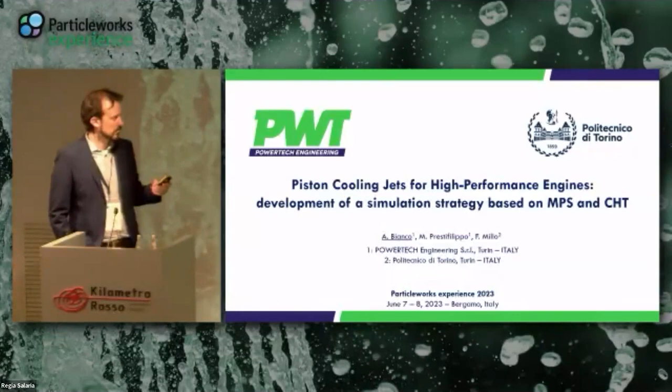I would like to mention that this work is the result of collaboration between Powertech Engineering and the Politecnico di Torino, and I'd like to acknowledge the contribution of my co-authors, Mattia Prestifilippo and Professor Federico Millo.

Let me just also introduce in one slide our company. Powertech Engineering is a consulting firm based in Turin, employing 40 engineers, and our core business is to provide simulation services mainly to the automotive field.

We are specialized in powertrain and vehicle simulations, ranging from 1D to 3D CFD, but we are very active also in hardware-in-the-loop and software-in-the-loop applications with our own test benches. We work mainly for the transportation sector for both on-highway and off-highway applications, but we are very active also in the marine sector and the power generation sector.

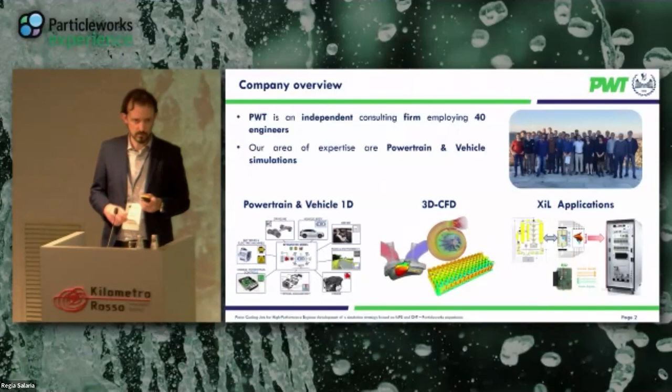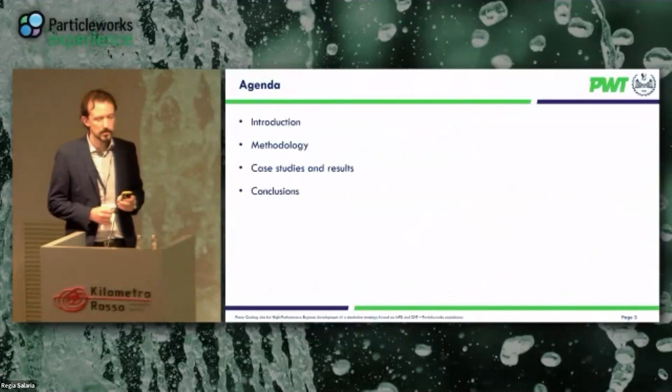Coming to the agenda for today, we will start with an introduction, and then we will describe the methodology we have followed and the main results we have achieved for selected case studies, and then we will wrap up the main outcomes in the conclusion.

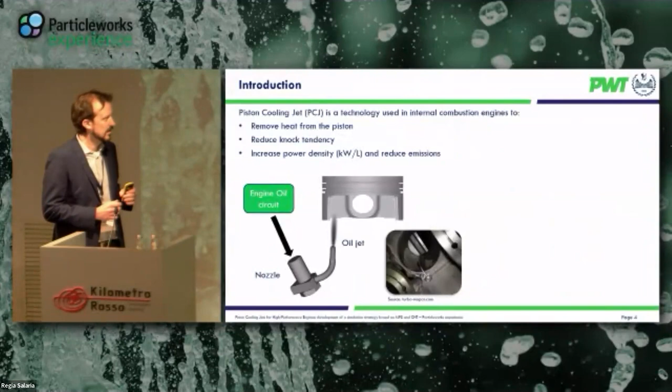So, first of all, what is the piston cooling jet? Given the presentation we have seen this morning, I can go rapidly through these slides. I would just like to mention that basically, thanks to the fact that we are able to control piston temperature, we are able to reduce knock tendency and increase power density and power output of the engine.

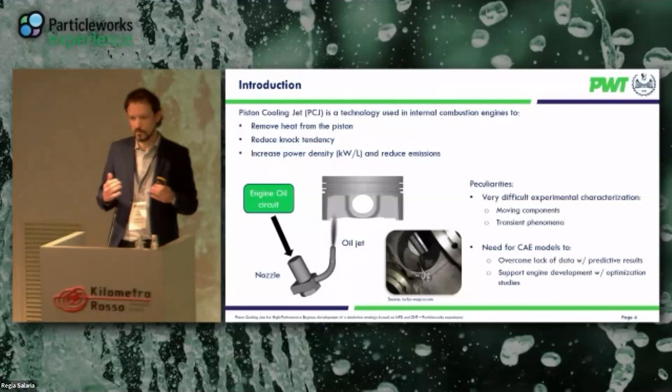Unfortunately, it is quite difficult to characterize this kind of system from the experimental point of view, and therefore we have to rely on simulations in order to overcome the lack of experimental data, as well as to support engine development and perform optimization studies.

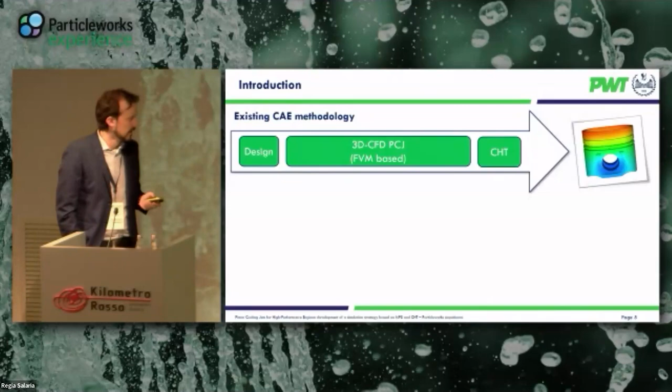This is the typical workflow that we previously adopted in Powertech to tackle this kind of simulation. Starting from a piston design, we performed 3D CFD piston cooling jet simulations using finite volume-based software, and then we performed a CHT analysis in order to extract the piston temperature distribution, as highlighted by this figure on the right. Unfortunately, finite volume-based simulations are quite complex because we have to deal with moving meshes, and this increases the user effort.

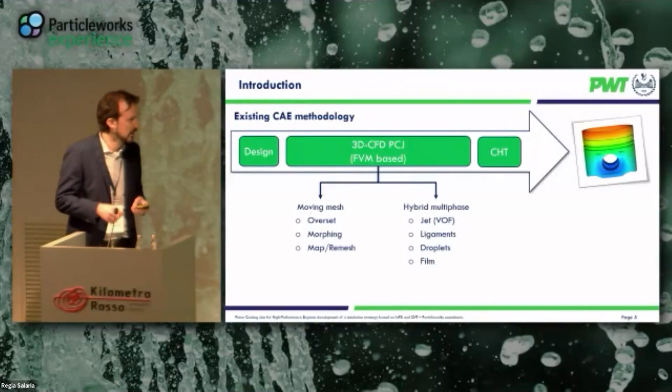Additionally, we have to deal with several multi-phase models, such as VOF, for example, for the jet coming out of the nozzle. Then we have Lagrangian models for the droplets, and eventually liquid film models for the liquid film forming downstream of the impingement zone. So in this scenario, we asked ourselves if it was possible to leverage the advantages given by Particleworks.

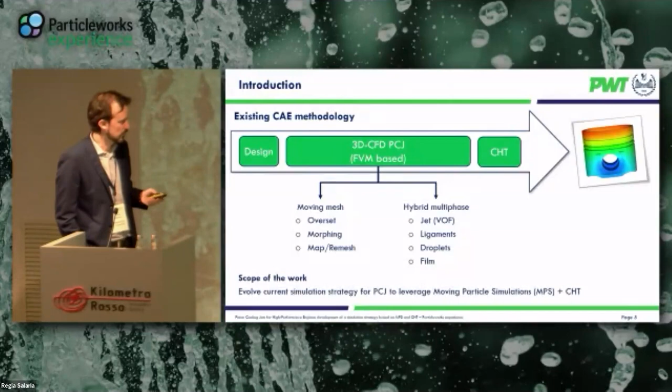We wanted to use Particleworks to speed up these kinds of simulations and integrate them within our conjugate heat transfer workflow. In other words, we wanted to move from the upper arrow to the lower arrow, where we substitute finite volume-based simulation with Particleworks, having the advantage of a meshless approach, using a particle-based description of the whole liquid. This translates into reduced lead time, and for us also the possibility to perform optimization studies.

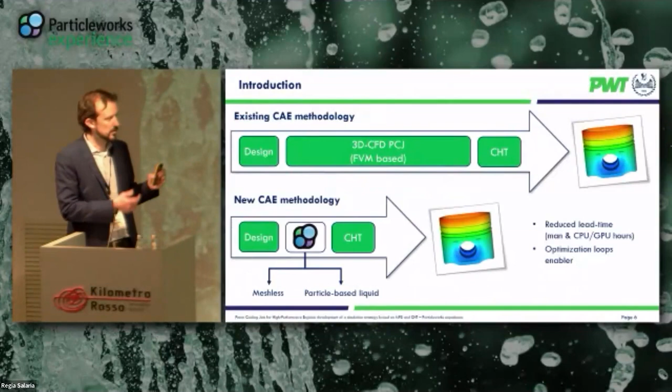In order to do so, we use what we call the stair-step approach. So at each step of this stair, we focused ourselves on modeling a simple problem still related to piston cooling jets, and then we'll move on to the next step, leveraging the knowledge gathered in the previous one.

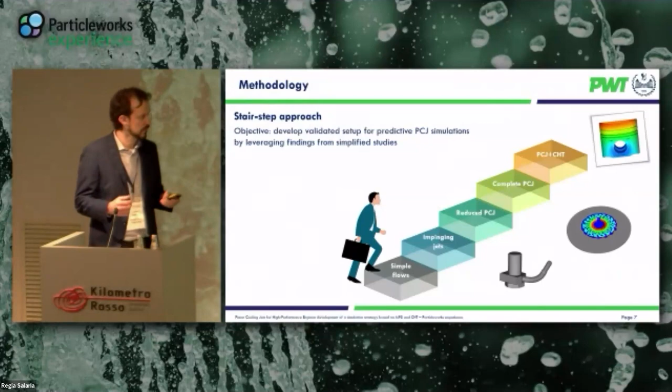For example, we started with simple flows, and we focused on what happens within the nozzle. Then we studied impinging jets in order to characterize the transfer coefficient in the impingement zone and downstream of it. We then moved on with the piston cooling jet studies, starting from simplified simulations up to the full integration with conjugate heat transfer studies. For the sake of brevity, in this presentation we will focus only on impinging jets and full piston cooling jet simulations with conjugate heat transfer.

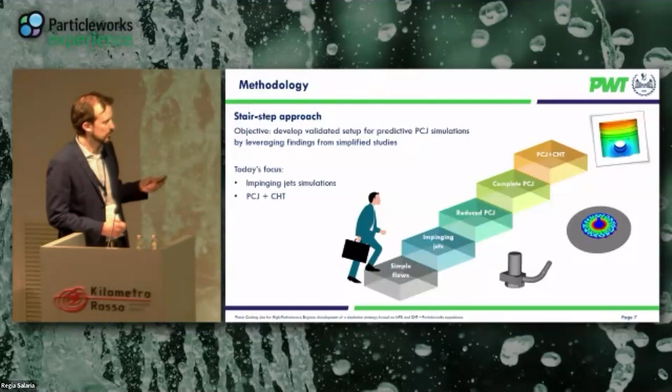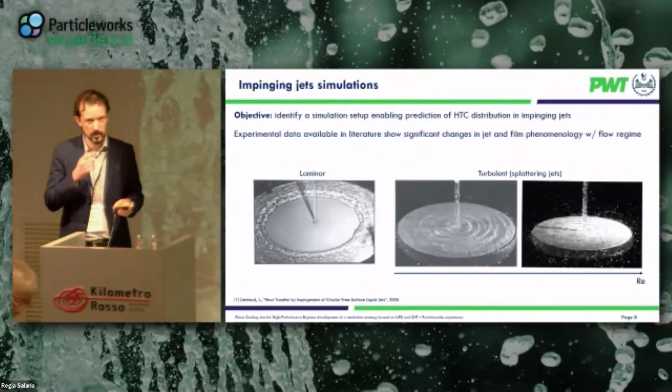Starting from impinging jets, our objective was the identification of a simulation setup able to correctly predict heat transfer coefficient in the impingement point and downstream of the impingement zone. In order to validate this simulation setup, we performed an extensive literature research, by means of which we identified suitable experimental data, and we found out that post-impingement dynamics are severely affected by the condition of the flow exiting from the nozzle.

For example, here we have some images showing what happens when we have a laminar flow impacting on a flat plate, and this is very different from what happens when we have a turbulent flow coming out from the nozzle. Even in a turbulent condition, when we increase the Reynolds number, we have post-impingement dynamics which are severely changing.

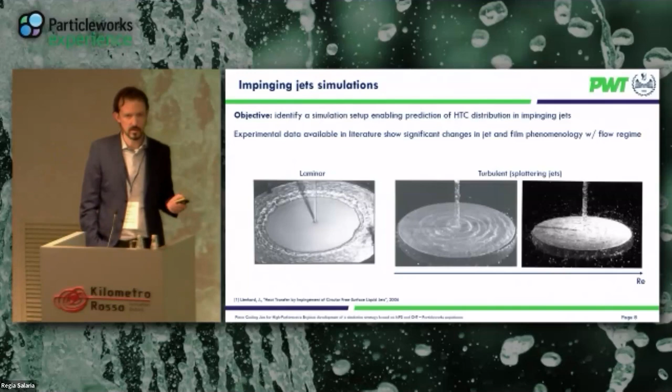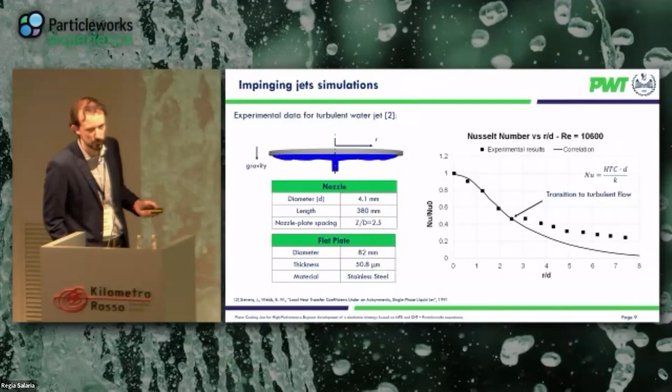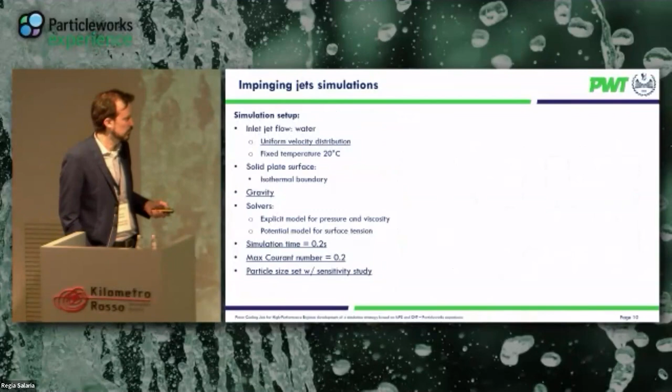In order to simulate these conditions in Particleworks, we used the setup summarized in this slide. Among these settings, I would like to underline that we used a uniform velocity distribution at the exit of the nozzle, and that we basically simulated 0.2 seconds with a maximum Courant number of 0.2, and that we performed a particle size sensitivity study.

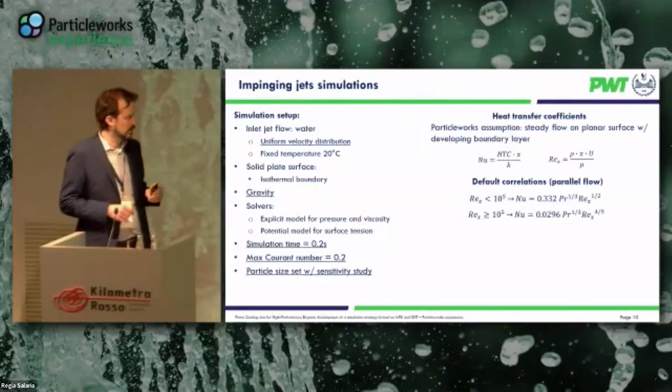As far as the transfer coefficients are concerned, the underlying assumption in Particleworks when we use the Nusselt correlations is that we are simulating a steady flow on a planar surface with a developing boundary layer, and therefore these are the correlations normally used in Particleworks. In our case, since we are modeling an impinging jet impinging normally on a flat surface, we have modified these correlations using literature data to be the ones shown here at the bottom, which already take into account the direction of the flow.

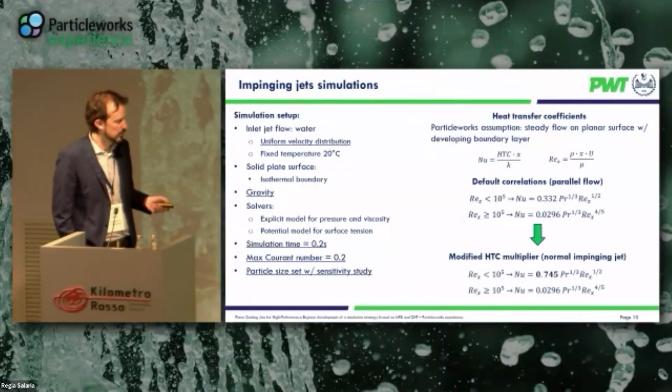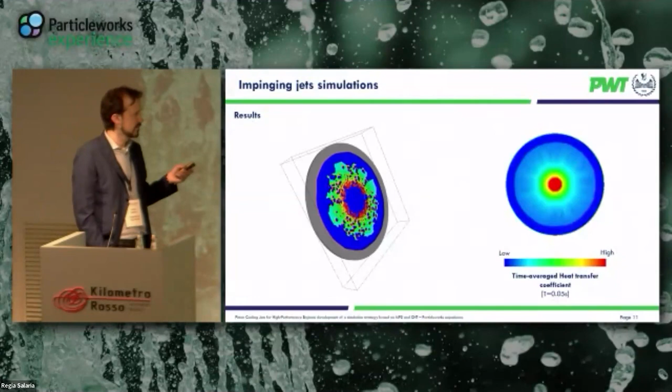Here we have some highlights of the results we achieved. On the left, we have the heat transfer coefficient on the flow developing on the flat plate, while on the right, we have time-averaged heat transfer coefficient measured at the end of our simulation. You can already see a qualitative agreement with experimental data, because we have a decrease in heat transfer coefficient when we move along the radius.

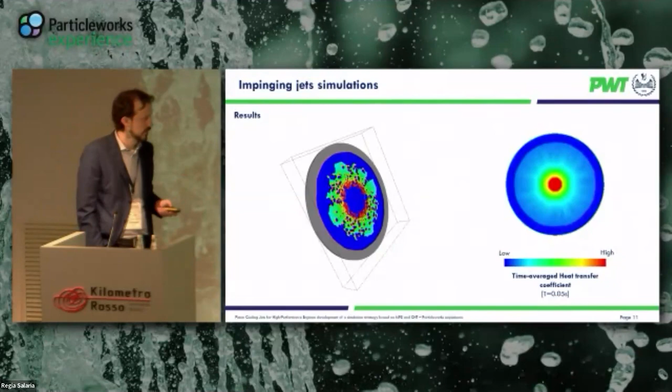Looking at the quantitative data, here we have the same plot we introduced before with the addition of three curves for numerical results. We have, in light blue, particle results for 0.5 millimeter, then in yellow, particle size 0.3 millimeter, and in green, particle size 0.1 millimeter.

Generally speaking, I would say that we see slight variation depending on particle size, and in all cases, numerical results are all able to correctly catch the transition to fully turbulent conditions starting from 2.5 diameters downstream of the impingement point. In addition, all numerical results are in very good agreement with experimental data already starting 1.5 diameters downstream of the impingement point for all particle sizes above 0.1 millimeter. You can see that there are still some differences downstream of the impingement zone below 1.5 diameter, and on the impingement point in particular.

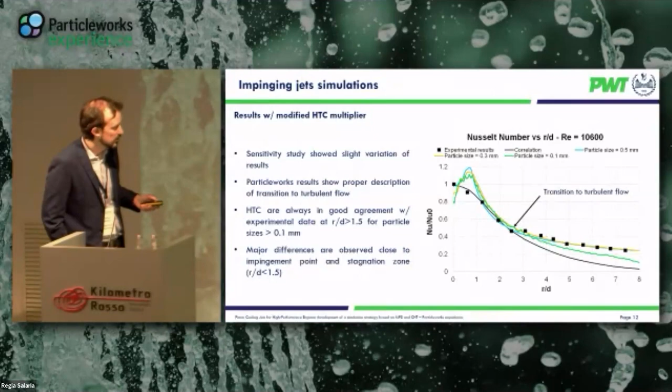Having achieved this, we asked if it was possible to further improve results in the impingement zone. Thanks to Prometech support, we ended up using a multi-zone HTC script, in which we subdivide the post-impingement zone into several subzones, in each of which we use a different heat transfer coefficient correlation. These correlations are then updated considering impinging jet velocity, nozzle diameter, fluid dynamic conditions of the liquid, as well as nozzle-to-plate distance.

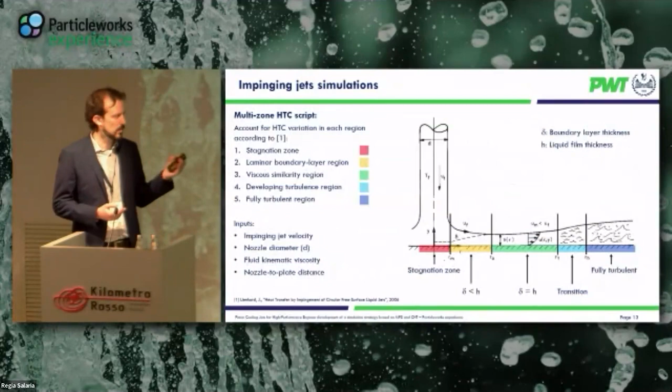Using this kind of script, we obtained the results highlighted in the same plot we've seen before, but in this case with the red curve. You can see that we are still able to correctly obtain very good results when we are far away from the impingement zone, but in this case, we have also significant improvement in the impingement zone, and on the impingement point in particular.

The only differences still present, basically related to this point at 0.6 diameter downstream of the impingement point, were deemed acceptable, and therefore this precision was sufficient for the purpose of our study.

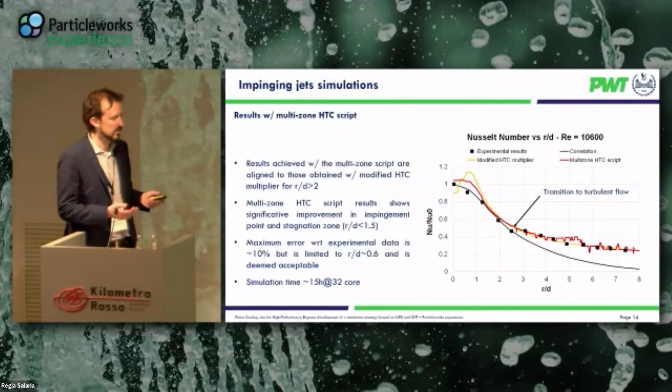So, coming to piston cooling jets, in this case, we took the opportunity to support the development of a new kind of piston for high-performance engines.

This piston was developed for V-type engines running at more than 9,000 RPM speed.

We also have the layout of the piston cooling jet configuration considered. We have a couple of nozzles with diameter below 2 millimeters and a flow rate higher than 6 liters per minute. The exhaust side nozzle targets a zone of the piston bottom right below the exhaust valve pockets, while the intake side oil jet has an oblique orientation, targeting a spread of oil over a wider area of the piston bottom.

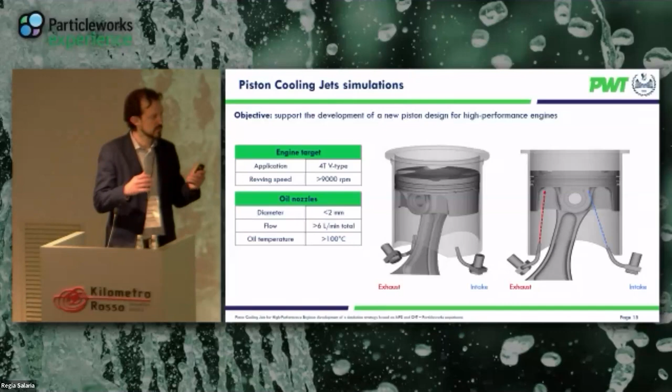For the simulation setup, here is a summary of the settings used, basically a carryover of what we saw for the impinging jet cases. We simulated 3 engine cycles, neglected particle-air interaction as a first approach, performed a new particle size sensitivity study, and used again the multi-zone HTC script we validated before.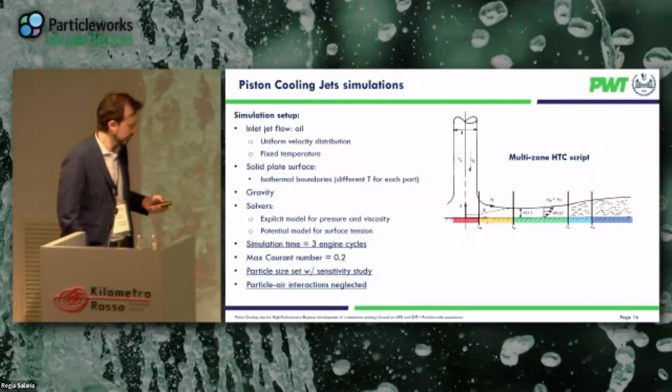Here we have a couple of videos showing what happens with the running engine and piston cooling jets active. In red is the oil jet coming from the exhaust side nozzle, and in blue the one from the intake side nozzle. In this case, the complete crank train was included in the simulation.

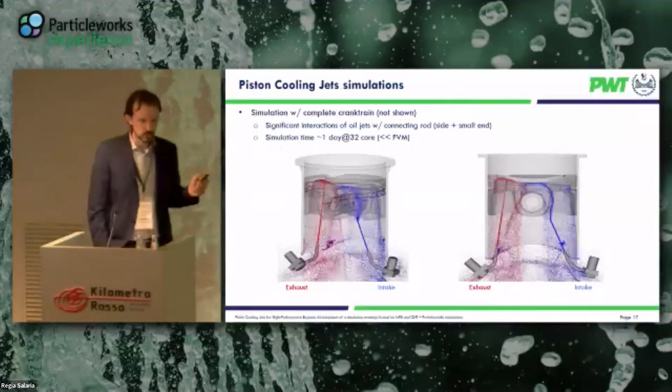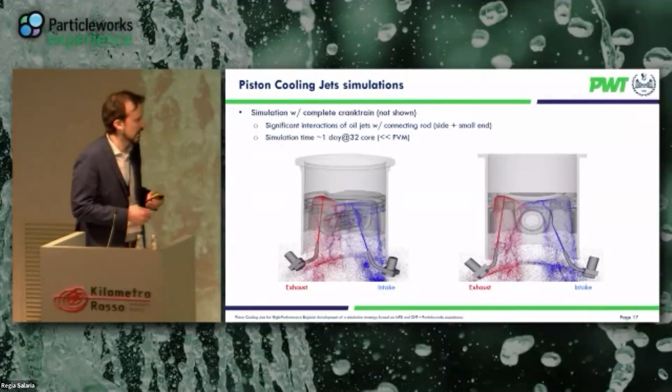You can't see it fully because of confidentiality reasons, but you can see the deflection of the intake side oil jet due to interaction with the side of the connecting rod. It was mandatory to include the complete crank train because we were looking for this interaction between the intake side jet and the connecting rod, to allow a wider spreading of the oil jet and reach as much as possible of the piston bottom.

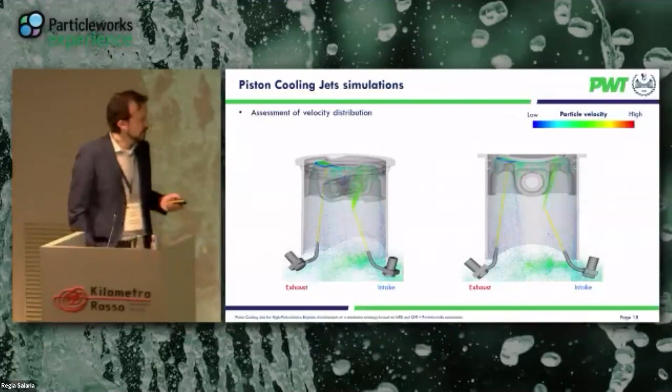Here we have some information concerning particle velocities, with slower particles in blue and faster particles in red. There are slightly different velocities between the intake and exhaust side particles, especially when moving from piston top to piston bottom.

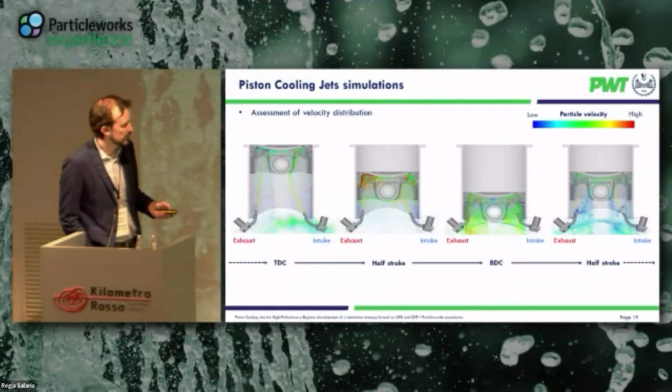This is more visible if we extract some frames from this video. We have TDC on the left, half stroke position with descending piston, then BDC position, and half stroke position with ascending piston. At BDC we have comparable particle velocities between intake and exhaust side particles, while at TDC and the half stroke descending position we have very different velocities between the exhaust and intake side.

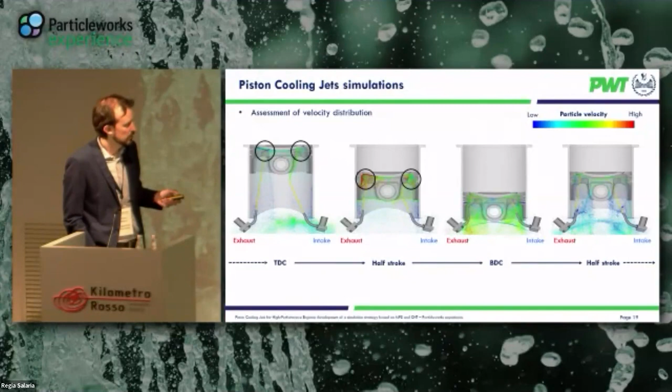This happens because the jet from the exhaust side nozzle directly impacts the bottom of the piston, while the jet from the intake side interacts with the connecting rod side before reaching the piston bottom, resulting in lower velocities.

Focusing on the first part of the engine cycle, with the piston moving from TDC towards BDC, we see these interactions already starting at TDC and lasting until the half stroke position, but the deflected droplets reach different parts of the piston bottom, as shown by these arrows, meaning we effectively spread the oil jet towards different sides of the piston bottom during the engine cycle.

Focusing on the second part of the engine cycle, when the piston moves from BDC to TDC, we see a peculiar phenomenon at the half stroke position: the oil jet follows the side of the connecting rod. Thanks to a Coanda effect, this oil jet goes around the small end of the connecting rod and reaches a zone of the piston bottom not normally accessible, overcoming the masking due to the piston pin and further increasing cooling in that zone.

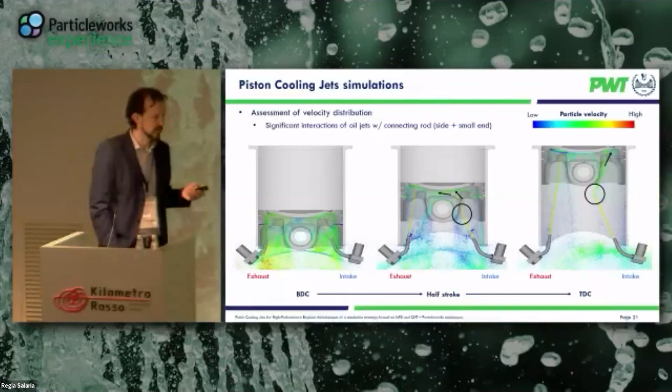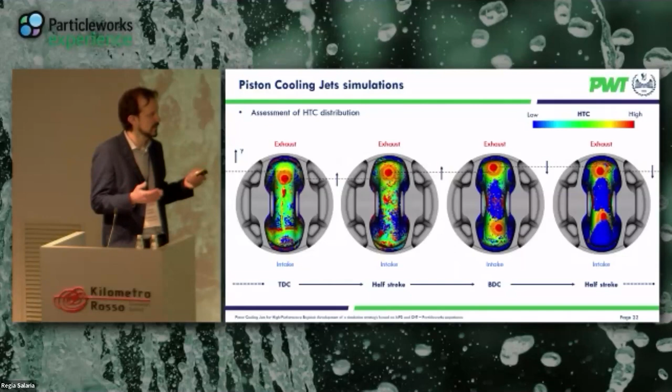Otherwise, we have interaction with the connecting rod, which is spreading the oil jet on a wider area. These are the reasons why we have this kind of green clouds around these images, showing the impact on a high number of particles having lower velocities.

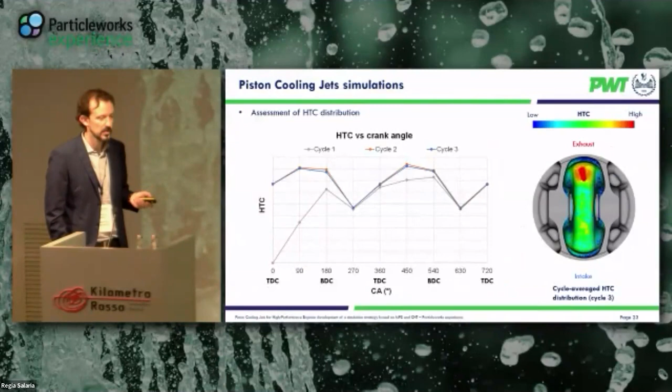If we extract cycle average heat transfer coefficient, we have the figure on the right, where we have this stretched red zone, which is the trace of the direct impingement point due to the exhaust side nozzle. For the rest of the piston, you can see a kind of uniform green colored area, which is the trace of the spreading of the oil jet coming from the intake side nozzle.

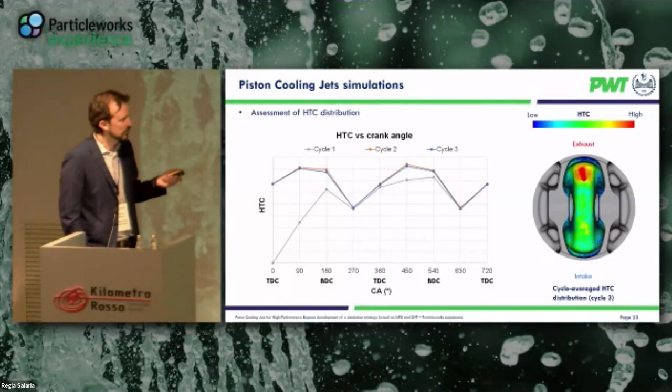The plot on the left is showing area average heat transfer coefficient along the engine cycle, and we can see that from the second cycle to the third, we have negligible variation of heat transfer coefficient. So in our case, the simulation of 3 engine cycles was more than sufficient to achieve steady cycle average values. This fluctuation we see here is consistent with the comments we already did a few minutes ago concerning the variation of relative velocities of the particles.

Here we have also some results concerning the particle size sensitivity study we performed. Starting from the left, look at these orange bars showing the area average heat transfer coefficient, which is increasing when we decrease the particle size. If we extract area average heat transfer coefficient only from wetted surfaces, we have these blue bars, which instead show constant values. So what's happening is that when we decrease the particle size, it is the wetted surface area which is increasing, shown by these gray bars. This tells us that the particles in the main impingement zones are doing the same things; it is the sides on which the liquid film develops which are extending, given lower particle sizes.

The plot on the right is showing wall clock time as a function of particle size. If we move from 0.2 to 0.15 millimeters particle size, we have a slowdown of basically a factor of 5 concerning wall clock time. This was, however, acceptable in our opinion, because these simulations are very fast compared to conventional finite volume-based simulations. We were able to simulate the 3 engine cycles in just 1 day using conventional CPU cores, not GPU, and using a particle size of 0.15 millimeters. We chose this size because of the additional precision on the wetted area extension.

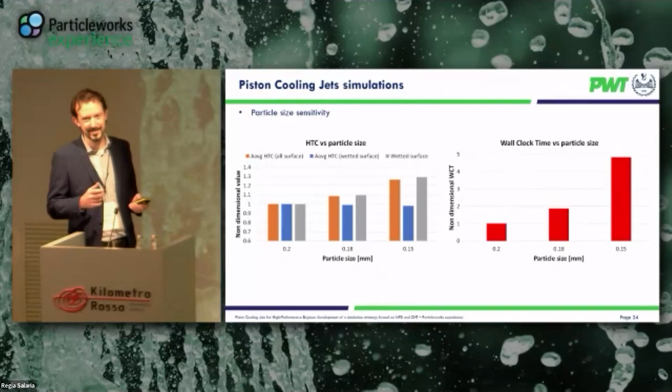So coming to, there is maybe a misalignment of the slides. I see that it is going forward there, but not here. I'll try again. No? Well, okay, let's see. Suspense. Well, in any case, I can anticipate the next slide.

Basically, we were integrating the results from Particleworks in our CHT workflow. The objective here is to compute a cycle average piston temperature distribution.

And what we do is to use a model in which we account for the information concerning heat flux coming from the oil jet. It is not working anymore, so probably it's better if you look, okay.

But basically, we are integrating information concerning the heat flux coming from Particleworks with the information coming from other sources of heat flux. So we have the combustion, the heat transfer with the liner, the friction, and the heat conduction with the piston pin.

All these kinds of information, fortunately it's not working here. It's only working there. So yeah, thanks for turning back.

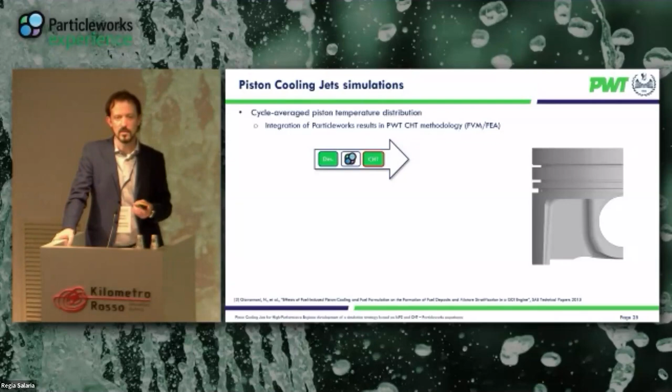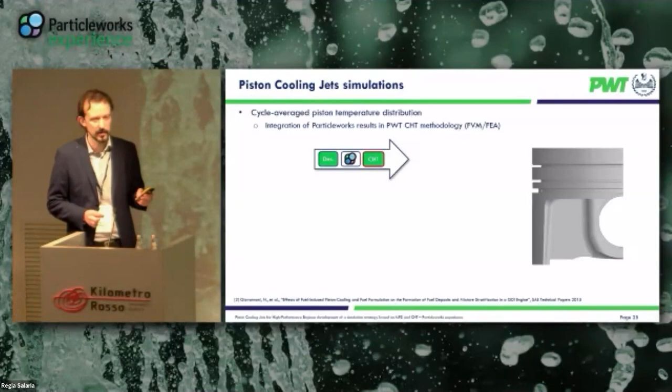Basically, this allows us to compute piston temperature distribution. Our methodology relies on a network of thermal resistances, used to account for the fact that each part of the piston sees different heat transfer paths around it, depending on what is in contact with the piston. For example, we have a path following the rings, a path following the liner, and a path following everything around the piston.

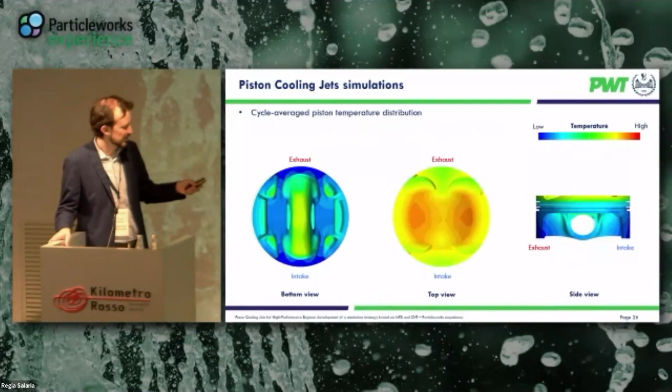We can see some peculiar aspects due to the presence of the piston cooling jet system. For example, you can see this cooler spot between exhaust valve pockets, which is in very good agreement with the zone directly impacted by the oil jet coming from the exhaust side nozzle. Thanks to this direct impingement, we are able to reduce the temperature in this critical zone, which is between the exhaust valves, one of the hottest parts within the combustion chamber. In addition, the maximum temperature zone is split in two, thanks to the fact that we are able to cool down the zone just behind the piston pin, thanks to the spreading of the oil jet achieved from the intake side nozzle.

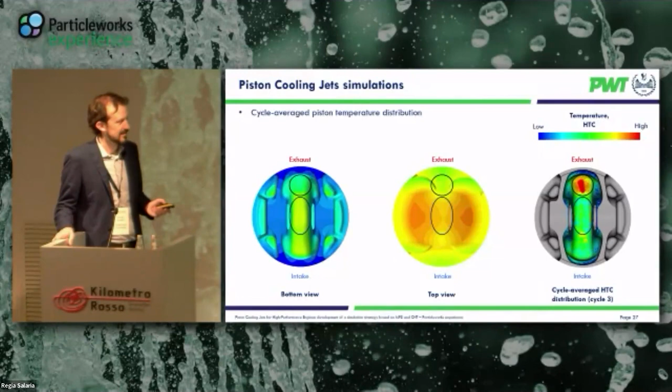I know I have to ask you to go look back for one more time.

So coming to the conclusion, a simulation strategy was developed for piston cooling jets, leveraging moving particle simulations and conjugate heat transfer. As far as impinging jets are concerned, Particleworks showed very good results compared with experimental data using the multi-zone HTC script, and the setup of the simulation was very easy, so that's an additional advantage.

For piston cooling jets, again, the setup was extremely easy, and computational time was reduced significantly compared to finite volume-based simulations. Last but not least, we were able to compute temperature distribution for a new kind of piston, showing temperature well aligned with the literature data.

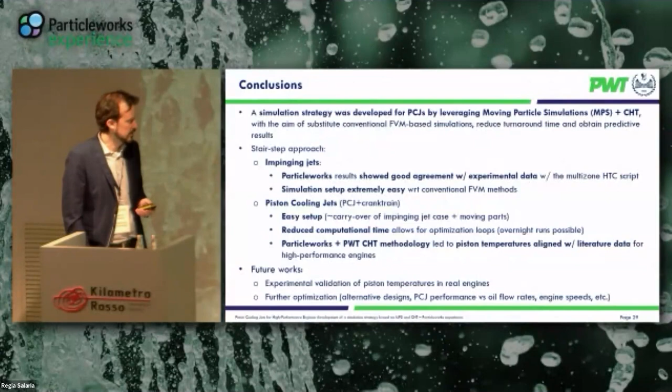Talking about future work, we are looking forward to performing some experimental validation of these numerical results, and maybe some further optimization of this piston cooling jet system. With this, I would like to thank you all for your attention. If you have any questions, I would be happy to add further details. Thank you.

So you ran on 32 CPU. If you ran the same simulation with finite volume CFD, how long would it take?

I would say at least a scale up of a factor of between 5 to 10, depending on the level of refinement we would need. So the speed up we have achieved with Particleworks is very fundamental, in my opinion. It's a key point enabling us to perform optimization studies.

And did you think about changing the geometry or comparing different configurations of the jets or flow rate values? Is there anything you think you can do?

Exactly. We are looking forward to performing some sensitivity study concerning not only orientation of the jets—because what we have seen is already well aligned to our expectations—but maybe also the sensitivity of the heat transfer coefficient to mass flow rates, and possible modification of the bottom of the piston in terms of geometry.